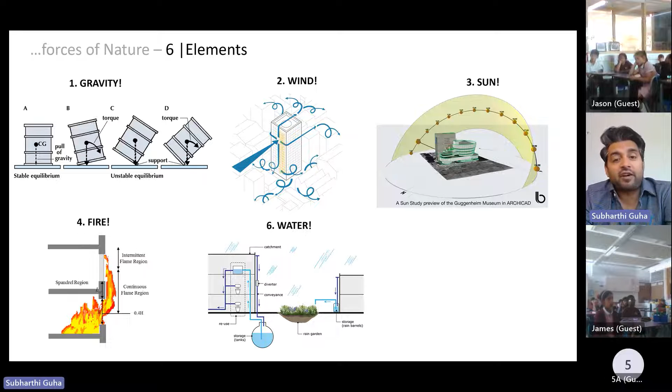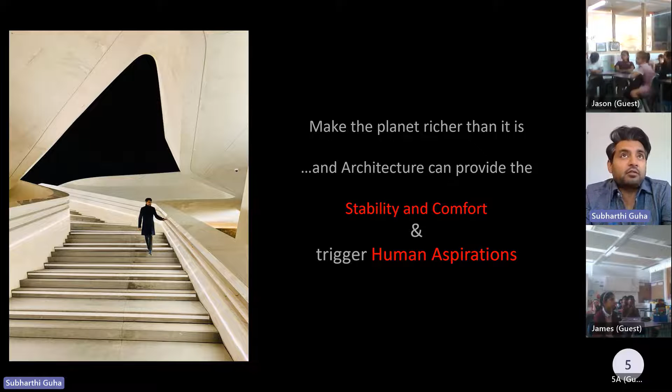We do that because we are inherently directed towards this aspiration. So in summary, we end up wanting to make the planet richer in its own content, we provide stability and comfort, and we trigger our own aspirations in general for architecture.

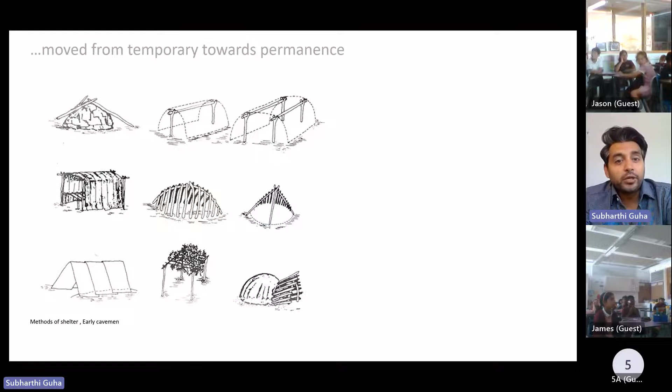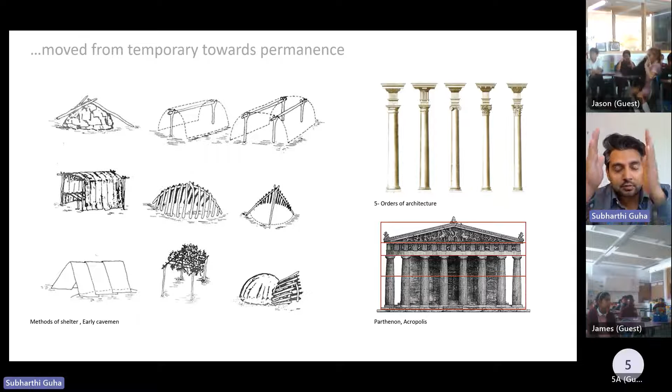So we started to develop these kinds of typologies of buildings early on with wood, but that wasn't enough. We aspired to build things that would last longer periods of time, because wood shelters deteriorate with time. So we went on to build a translation of these woods into orders of architecture - you can see the bark, the column capitals, and so on - which led to a series of developments in different fields.

Some were churches, mosques, icons, modern pyramids, stations, and all different typologies came into being. So to do that, we created some kind of a linear presence of time, so you can look back and look at different eras of developments and how we have progressed.

Which led me to believe there's a constant exploration into a new future, which is always unknown. I went through different offices - I worked in the office of Charles Correa, then Zaha Hadid, and also myself - just for this one purpose, to search for a new architecture, and it's always changing.

So today I will show you some categories of buildings. The first category I've put into booleans, which literally means, like what you do in geometry - let me see if the picture comes - it's basically you take multiple different geometries and you intersect them.

You can see a lot of this in art, and art and architecture and sculpture kind of translate into one. The only difference is, as you move towards architecture, you have to take nature's forces into account. And therefore you see a transition from Piet Mondrian painting - they were all in the same time - to Rietveld Schroeder House. So it's a painting towards an architecture that's also part of the painting, but obviously has spatial quality.

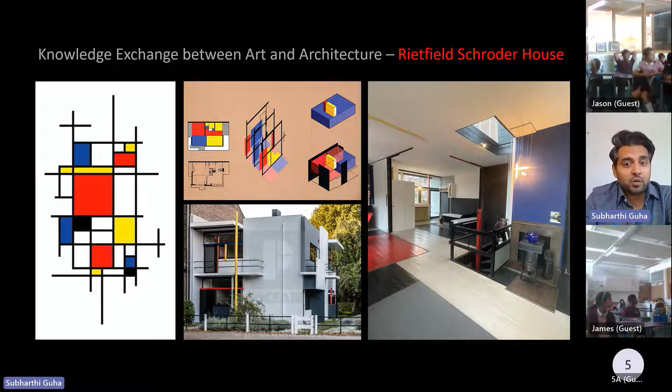Similarly, you see this kind of interpretation of the relationship between Corbusier's work in the Ronchamp Chapel. And similarly at Zaha Hadid, it was inspired initially by the Russian Constructivist movement, done by Malevich, and then started to explore.

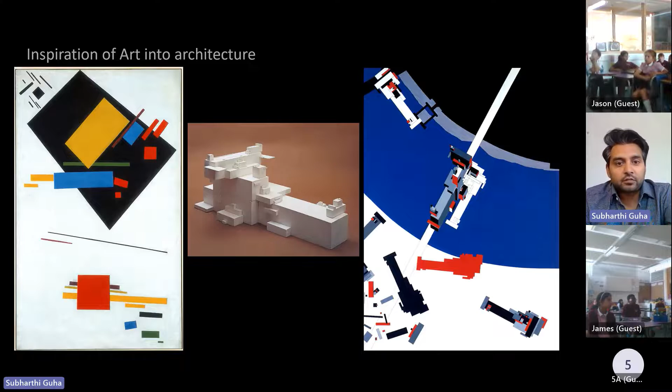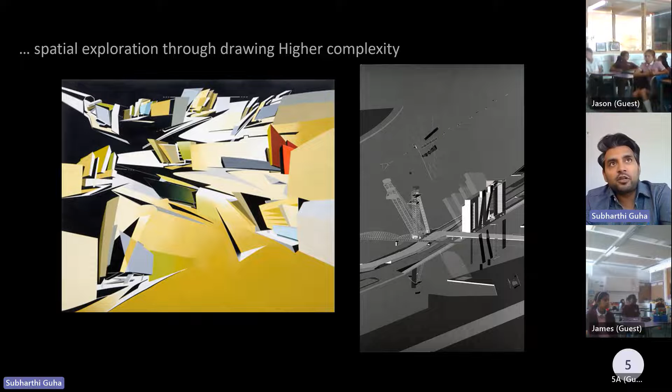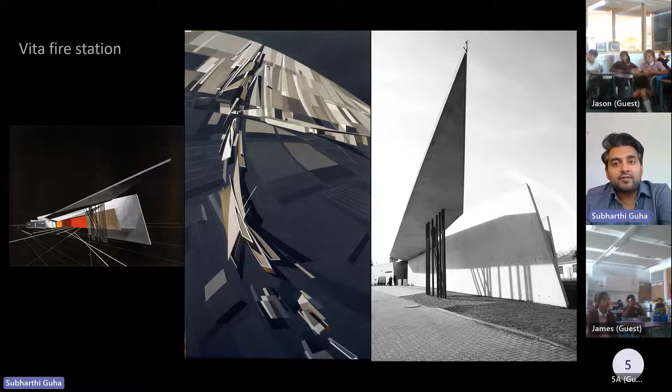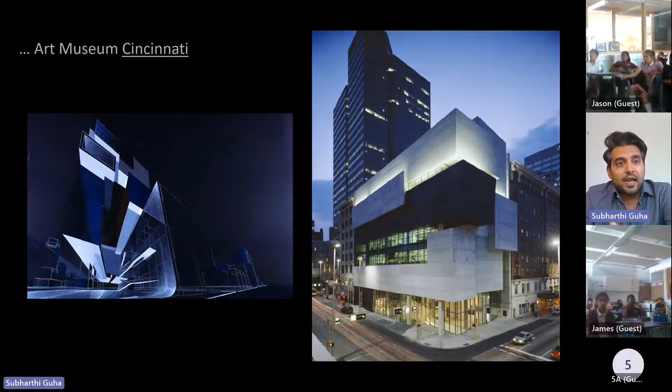And therefore, the exploration in the painting then started to develop these booleans into this trajectory of motion, which led to buildings like the Vitra fire station, where the paintings were developed time and again to give that notion of movement, and you get the building on the right. Similarly, there's another building that talks with this idea of booleans, the Museum of Cincinnati, which also uses a similar language.

Then there are other places where these booleans don't interact. They sit exclusively, like the Port Authority of Antwerp office, or they kind of blur together and merge to form a seamless boolean, like in the Guangzhou Opera House that we did in China. So all the booleans join together and form the seamless fluidity of space.

The second exploration is lines. This is quite interesting because one of the greatest inventions by human beings, I think, is the straight line. It doesn't exist in nature, and we created it, and created all kinds of geometry with it.

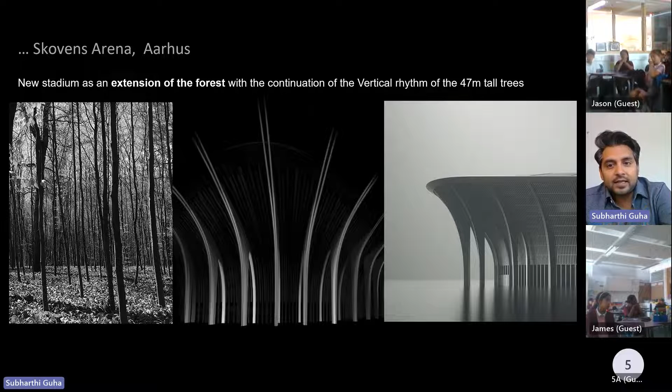This is a project I'm currently doing. We won this project last December in Denmark. So you see, we took the forest, the stadium—it's a stadium project in the forest. We took the verticality of the forest and then took those lines and started to design the stadium. So this is the concept of the stadium.

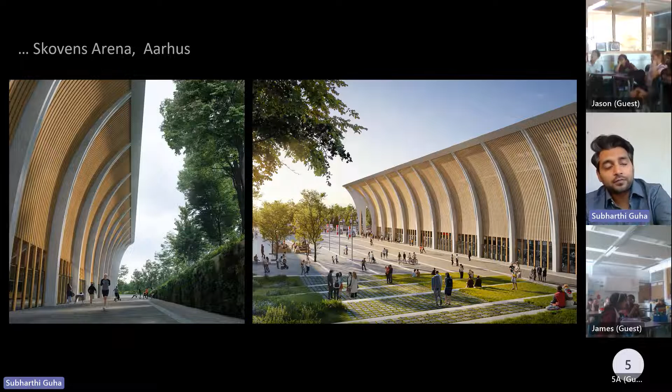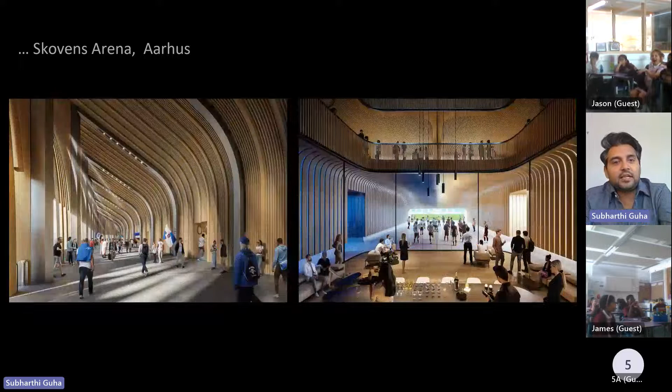You can see this verticality of the trees and the shape of the trees are mirrored in the stadium. So the canopies come out and the shape of the stadium responds the other way. And therefore, this is the image of the stadium. This kind of translates verticality, and it also translates into the interiors as well.

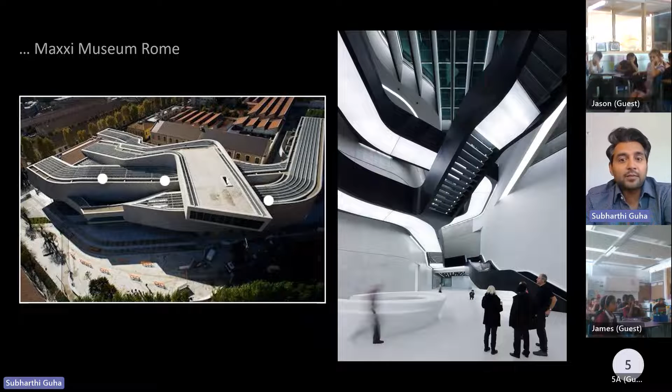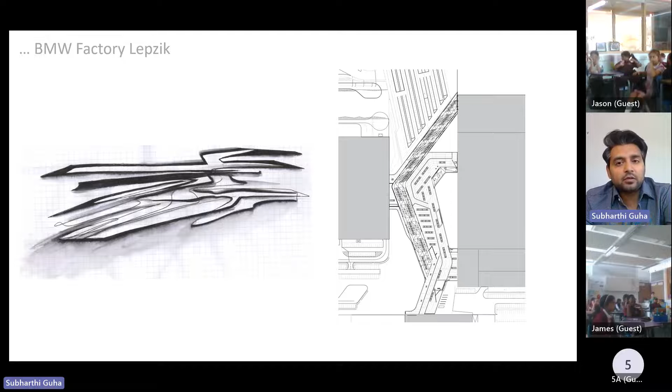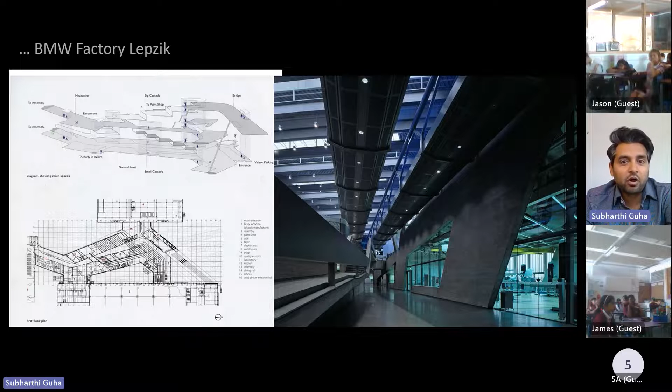There's another one which is now a factory, the BMW Leipzig factory. Here the lines were used to connect two different factories—the two gray blocks were used to connect in this building. Through the connection, it was an idea of mixing people who make cars in the factory and people who work on the desk in the factory, and they could look at each other through different levels. The cars go on top and the factory people work on the bottom.

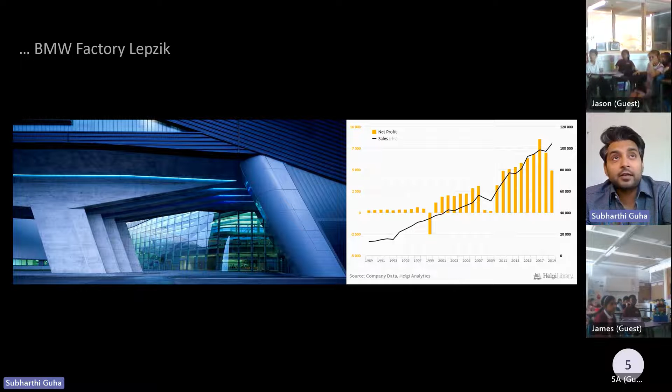Here is an example of that. As you can see, the cars are moving on the top, people are having their canteen and food on the bottom. That resulted in many things. One, of course, it was an iconic building. Secondly, if you look at BMW's growth model, once the building was finished, the interaction levels were high. BMW became one of the pioneering automobile companies in the world, and their growth was very substantial.

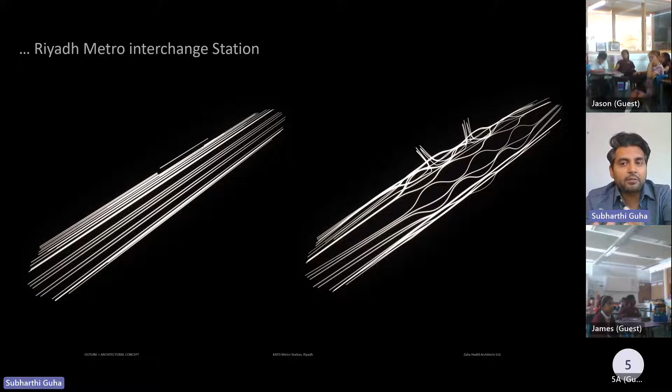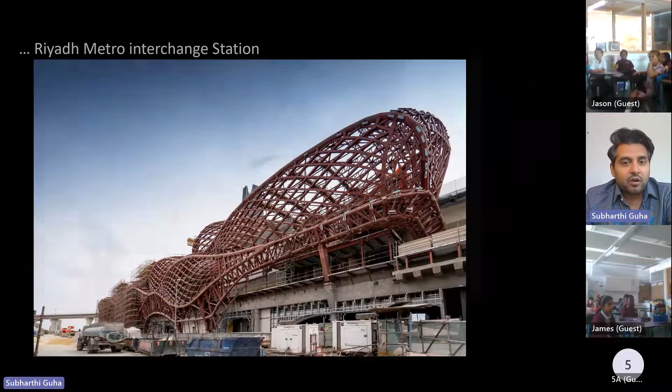This is another project I did in Riyadh, the metro station. Here the lines were used to go outwards so that we can create a bit more space on the top for the metro stations. So this was the initial concept stage, and this is the construction of the project. And now you can see that the project is built in Riyadh, and this is the interiors.

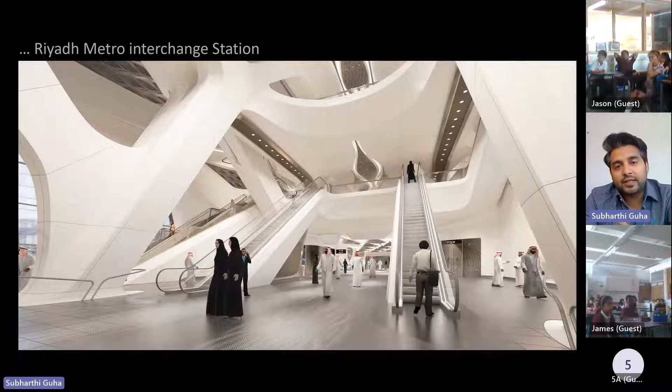And the interiors then work with booleans, which we have seen before, that merge into one another to create this fluid space. And here you see the real picture. So the first picture before was a rendering that we create to visualize the building, and then you achieve the final product, and this is a real picture of the building. This will open this year.

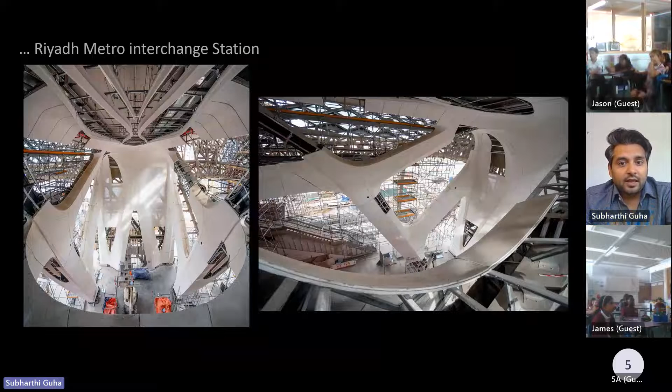And these are some construction pictures, how it works on site. This is a cross section that tells you that there are two layers of metro lines, subdivided by one layer of transfer. On the top you see the rendering of the model, and on the bottom is the real picture on the right hand side of the building. So it's quite close to what we imagine.

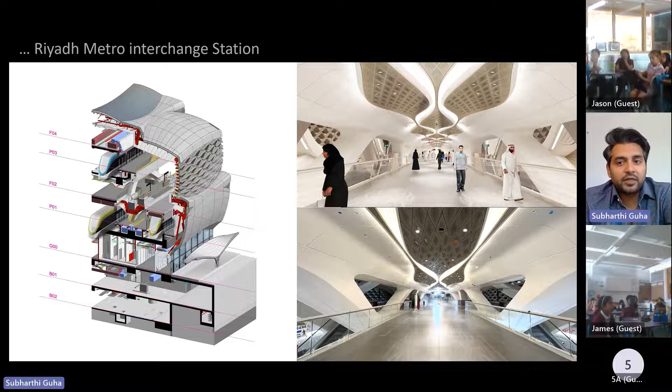Similarly, here you can see the rendering on the left, and the real picture on the right that's built.

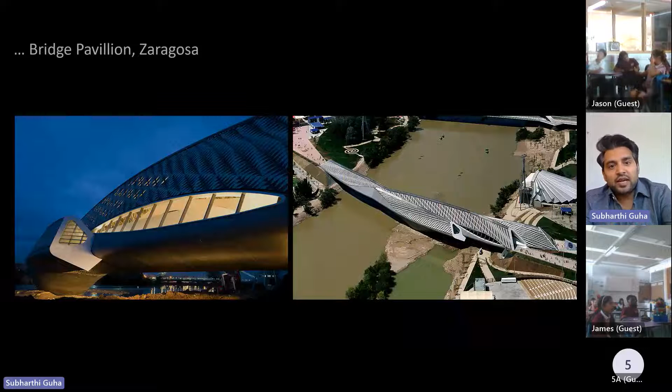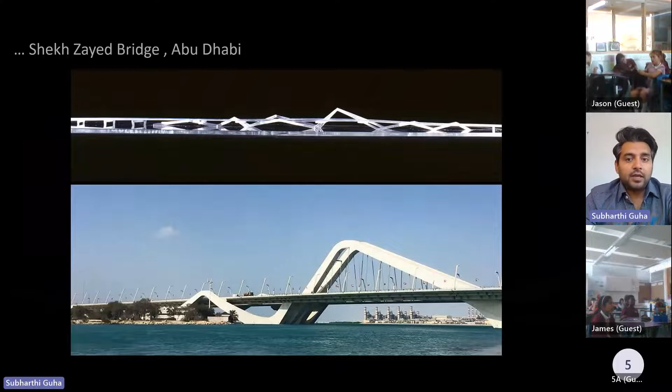Other forms of buildings use lines for design, like this bridge pavilion you see here, and another bridge in Abu Dhabi which also used these lines going up and down. These lines can also start to become very vertical.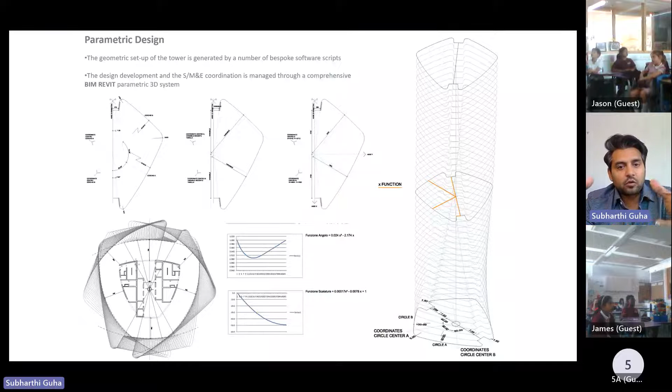This is the Milan Tower, and it uses two curves, one for the floor plates to grow and one for the building to twist. The twist is uneven, and these curves are plotted to give the floor slabs, as you can see.

I'll move a little bit faster. I think it's got stuck. Okay, let's see if this works.

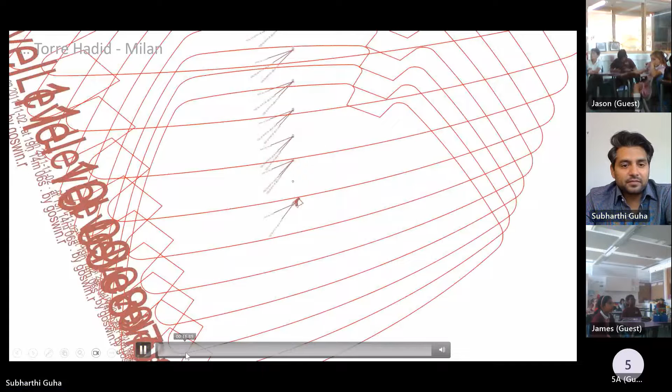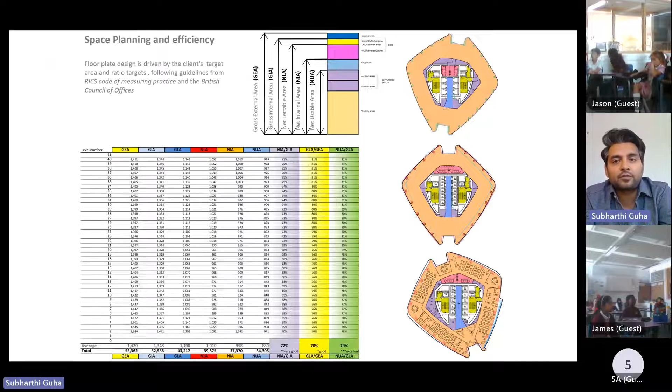Sorry, I think the video is not working, but you can see that these floor plates are drawn by these curves, and then we get data on the area of every floor and so on. It's all digitally done, and this is the finished product of the tower.

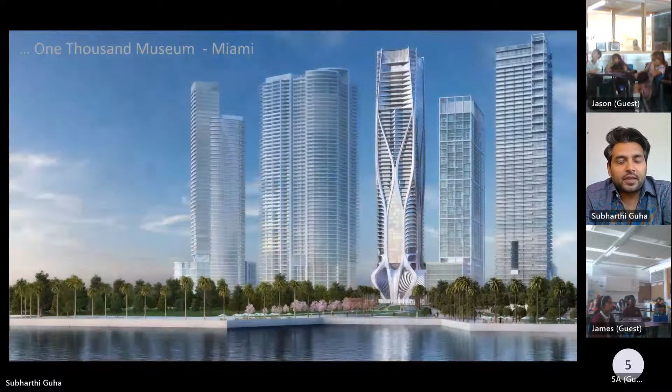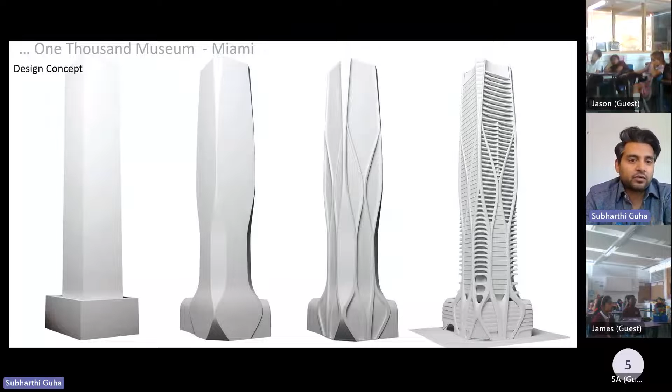Similarly, there's other towers like this one in Miami, which we built recently. This is sculpting the lines in the tower - if you have a solid block, you mold it, shape it, and sculpt it.

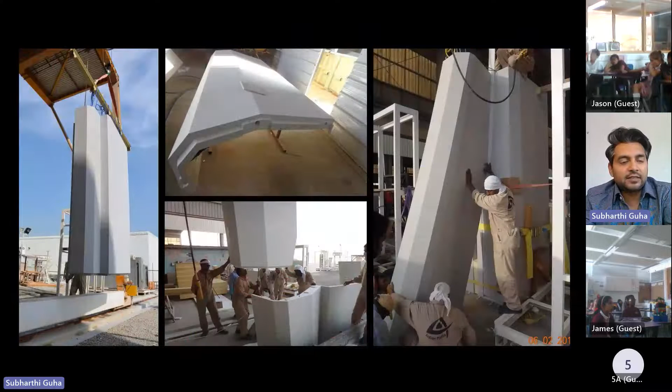Then you go into the fabrication process, doing some tests of how we will create it. The tower is built together with the formwork, so the formwork itself becomes the building - there is no additional formwork. These are some construction pictures and built pictures of the tower.

A very famous footballer has moved in here, called David Beckham.

The second last item I'll talk about is this idea of dunes and petals - these formations of dunes have inspired many architects before, like Candela's very thin structures, or Utzon's Sydney Opera House, with these petal-like structures. We also explored that region.

We did some very early initial metro stations in Austria, and then recently one in Sharjah that looks like that. Also this kind which you see in the Olympic Center in London, the Aquatic Center, is also a form of that petal-like structure.

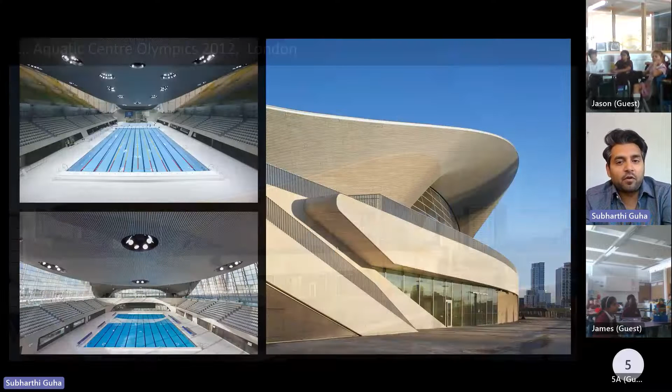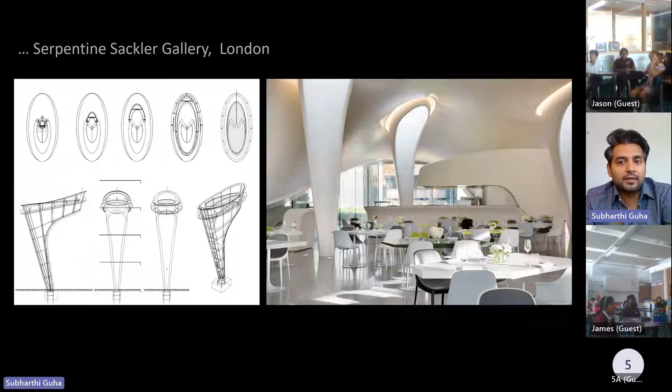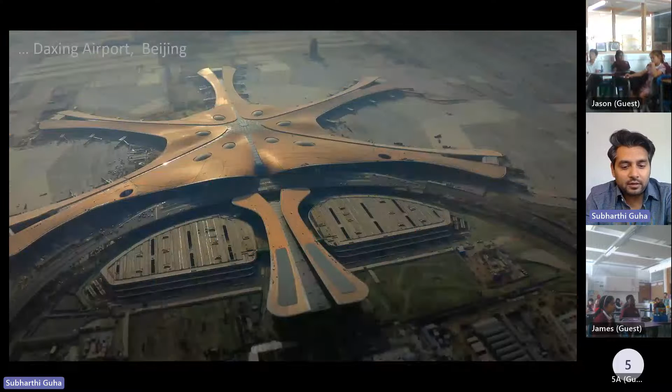This is another shape and form of these columns and petals I was talking about, and this is the largest airport in Beijing.

I'll leave the video to play a little bit so you can see it.

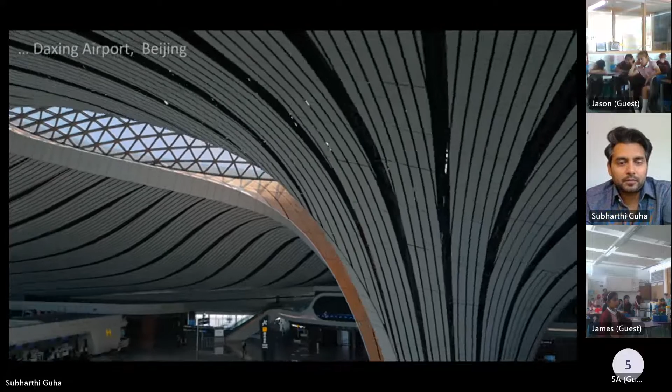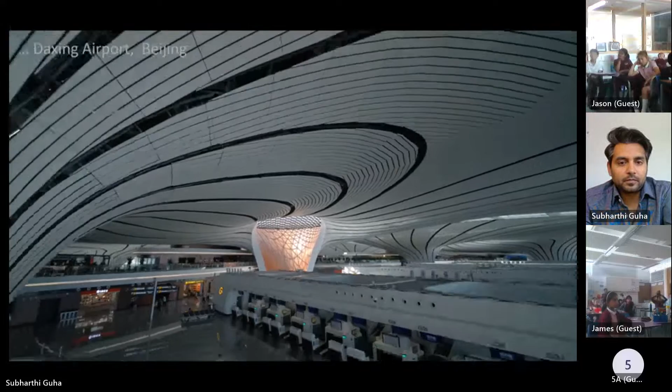These are the columns that bring light all the way through for all the different levels - arrival, departure, everyone gets natural light in the airport. And this is the central space.

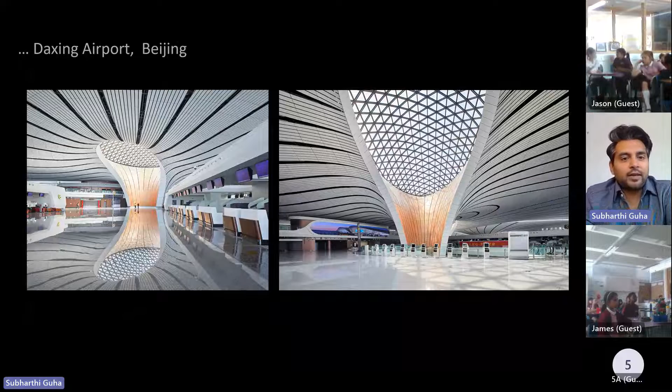As you can see, the natural light comes in all the way and it looks interesting. There are about 100 million people who cross this terminal in a year. It's the largest in the world, and it's very compact, a star shape and very compact.

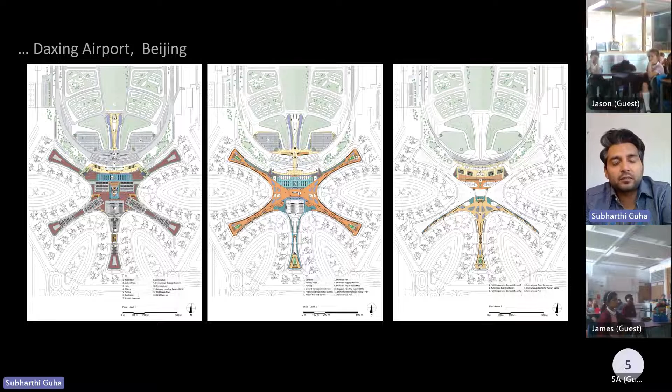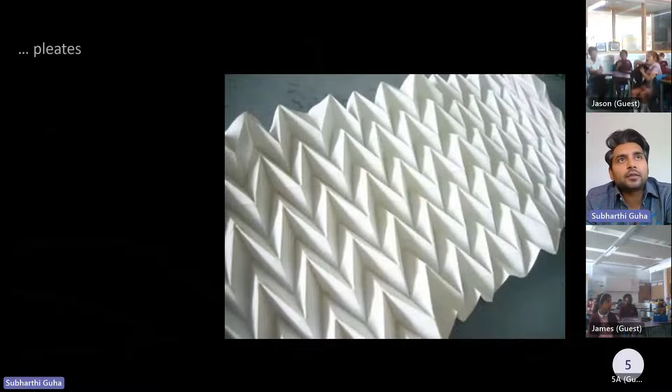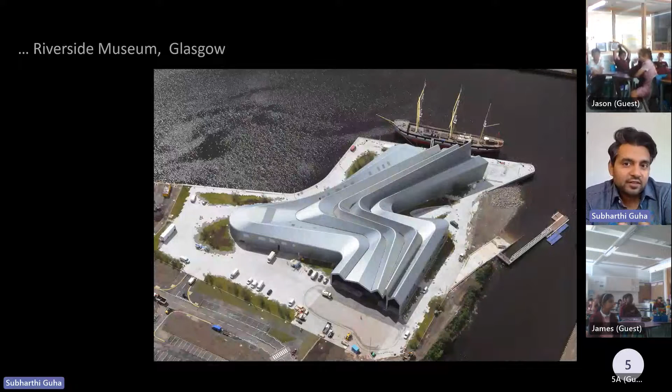And the last item, as I said, is the exploration of these pleats, which is kind of this origami-like folding, bending, and so on. This is a museum in Glasgow that uses this pleat technology, which makes the roof stiffer and more structurally stable.

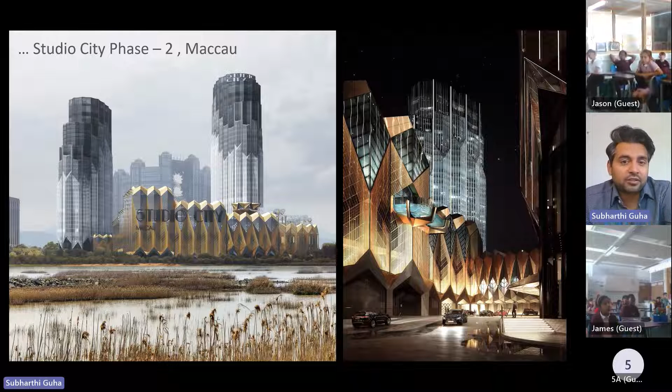This is another one I worked on in Macau. It's finished this year, so these are the rendering pictures. It's 2 hotel towers and a casino, a water park, and a cineplex, with many functions in this. This is the real picture of the building now finished.

You can see how the renderings kind of give us a direction to get closer to reality. Again, this is a rendering of the building, and now you see the real picture of the building on the right as well.

So thank you, everyone. I think that's all I prepared for today. So I'm going to stop presenting and take any questions you have.

Well, thanks very much, Subharthi. There's some amazing images, and that video of the airport there—this class here were all open mouthed, it's quite amazing. I think what we're going to do is, if we can maybe take 3 or 4 questions from each class, and then we'll just go around those classes that are attending, and then we might as well, if there's time, show you some of the models that some of them have made. Does that sound okay? Right, 5C, does anyone have a question for Subharthi that they'd like to ask?

Mia asked about the last hotel we saw, how long did it take? The Studio City started in 2017, November, and is finishing this year, so you can say about 5 years. Someone asked if that's the one where David Beckham bought a place - no, that's Miami.